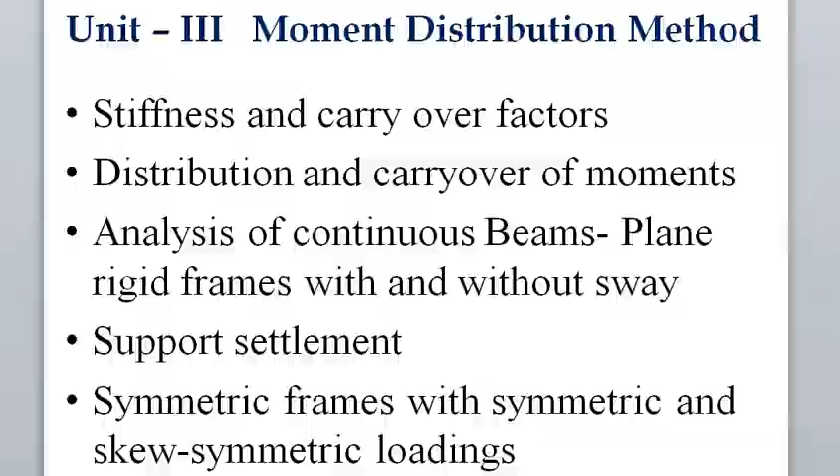In the previous lecture, we have discussed about the procedure in solving the rigid frame with the sway effect. So based on that procedure, we will try to solve this problem.

Analyze the rigid frame shown in figure by moment distribution method. In this frame we have one horizontal load at joint B and supports A and D are fixed but at different levels. That is geometrically unsymmetrical and horizontal load is active. Therefore, the frame will sway.

So the analysis of this problem consists of two parts. First part is non-sway analysis and the second part is sway analysis.

In non-sway analysis, we arrest the movement of the frame by providing a virtual horizontal support at joint C.

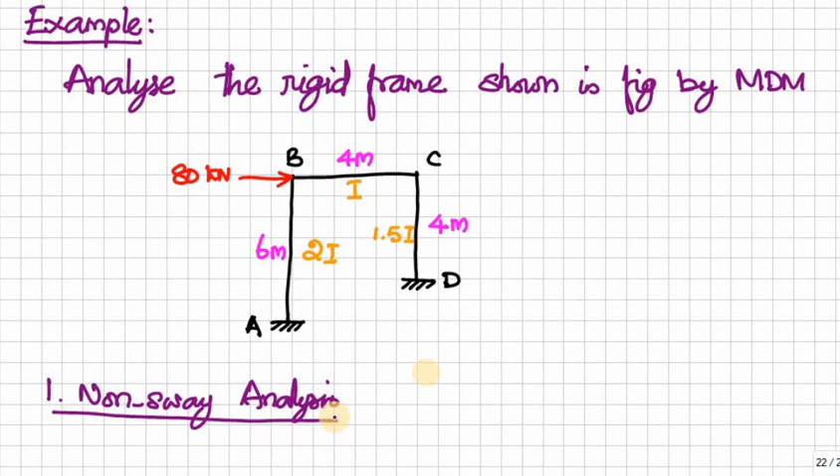And there is no span load in this problem, so fixed end moment in all members is equal to 0. So we assume the horizontal reaction in the virtual support as S.

As fixed end moments in all members are 0, there is no non-sway moments at joints. So no need to formulate or derive the distribution factors in this non-sway analysis and no need for distribution table.

Suppose if we have any span loads causing fixed end moments, then we should derive the distribution factor as well as distribution table so that we will get joint moments. For example, say MAB, MBA, MBC, MCB, MCD and MDC.

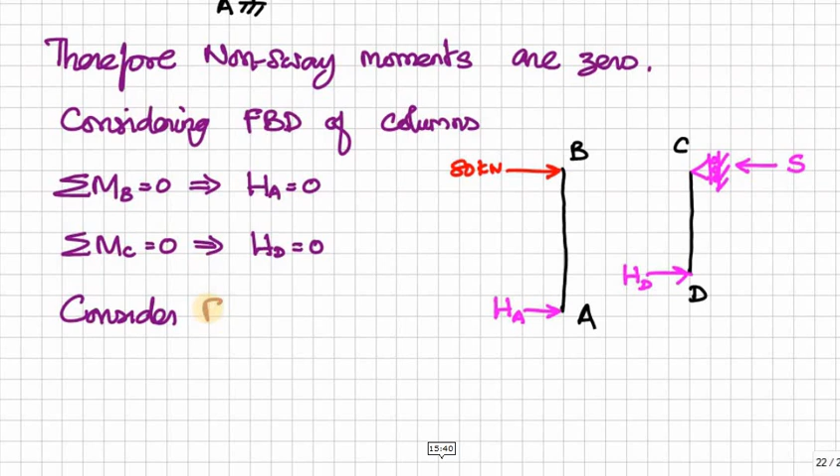Now consider the free body diagram of horizontal beam, that is BC. Here also applying sigma H is equal to 0, we are getting the value for S, which is equal to 80 kilonewton acting towards left direction.

So that's all the non-sway analysis step. Now we have to carry out sway analysis step.

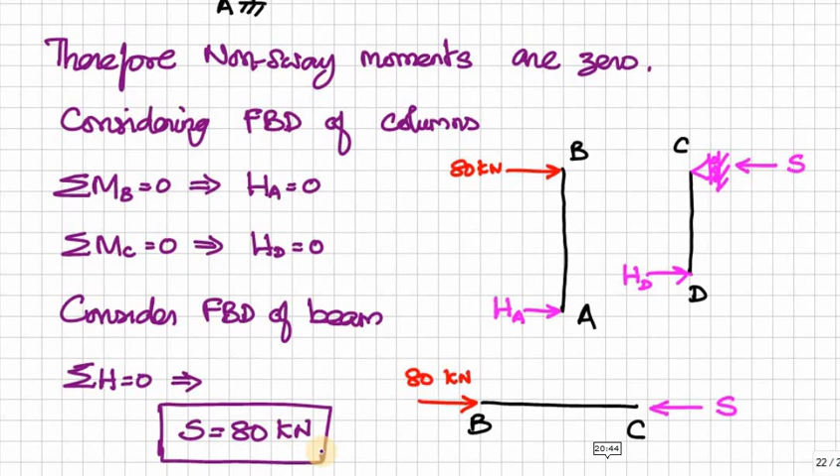And we don't know exactly the sway, that is delta, by which the frame will move towards right or left. We initially assume the sway as delta amount. So we will carry out the sway analysis by this assumption delta.

Later on we will find out the actual sway moment.

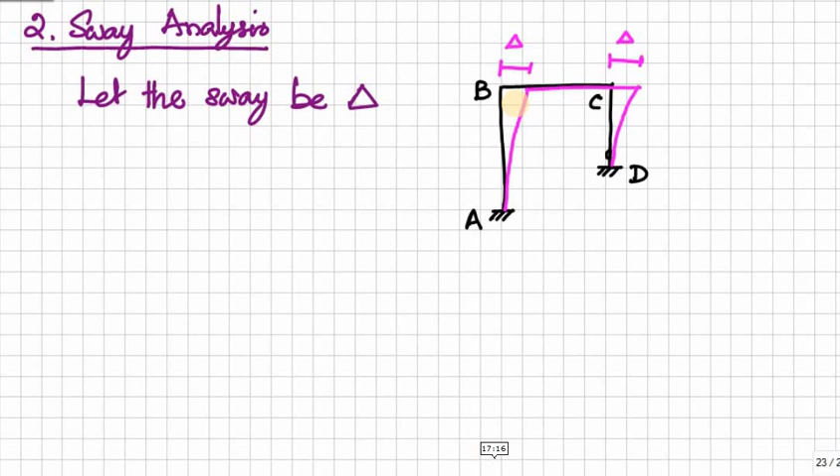So because of the sway by delta amount, the column AB will have some moments due to this delta. Similarly, CD column will have some moments due to this delta. But there is no moment in BC due to this sway delta, because as far as BC is concerned, only rigid body motion happens. There is no relative displacement between B and C joints.

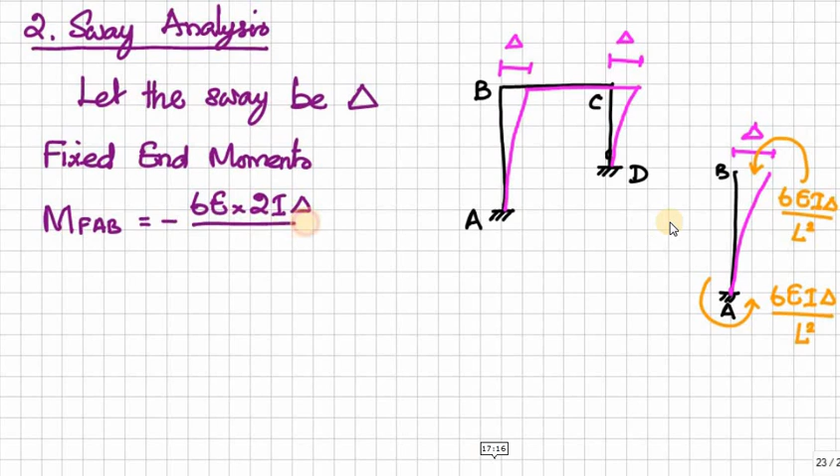So due to this delta, the fixed end moments MFAB is equal to MFBA, is equal to 6 times EI delta by L square, and in the anti-clockwise direction, therefore minus. So minus 6 EI. For AB column we have 2I, therefore 6 EI into 2I delta by L square, L is nothing but 6, therefore 6 square. So which is equal to minus EI delta by 3.

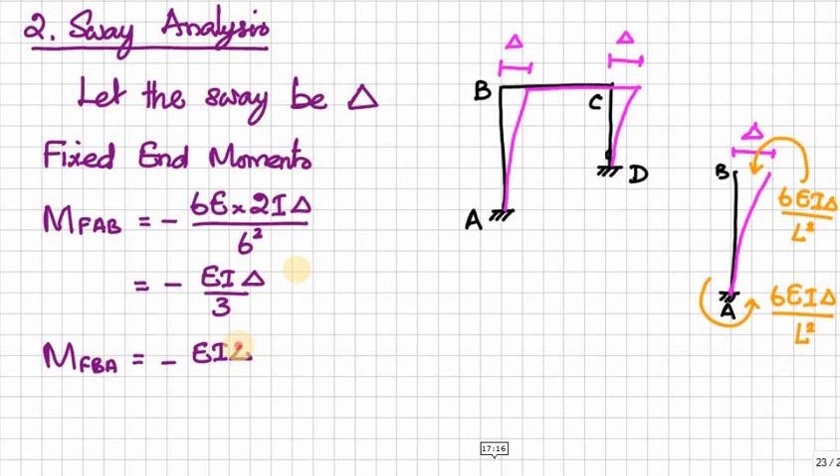So MFBA is also equal to minus EI delta by 3, with the same sense of moment and same numerical value. And considering CD,

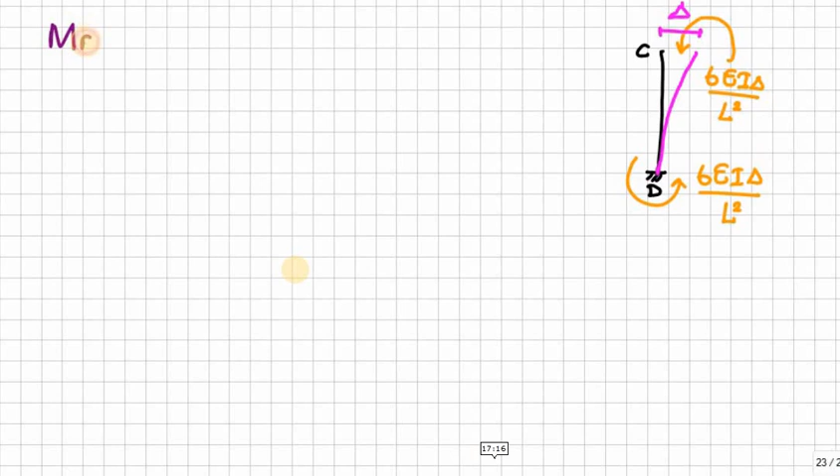MFCD is equal to MFDC is equal to minus 6EI into 1.5 times I delta by 4 square, because L is equal to 4 meter and I is equal to 1.5I. So which is equal to minus 9 by 16 EI delta.

So these are the fixed end moments based on the assumed sway delta. We don't know the actual delta value. So to start the problem, the sway analysis, we need some numerical value. Unless we have a numerical value, we can't do the distribution table step.

Therefore, initially we assume proportionally the moment, sway moment or joint moment, because so far we have the fixed end moment. So we initially assume proportionally between the columns by taking ratio between those two columns' moments.

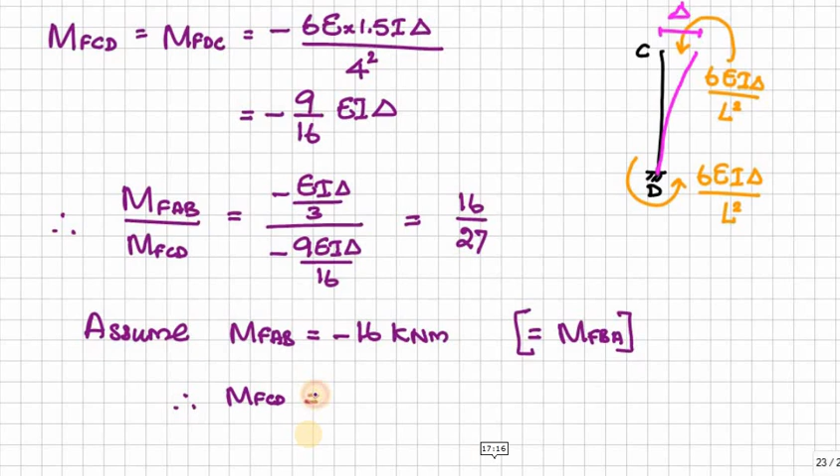Because now the moments are anti-clockwise. In AB column and CD column we have anti-clockwise moment. Therefore minus 16 kilonewton meter, which is also equal to fixed end moment in BA. Similarly, fixed end moment CD is equal to minus 27 kilonewton meter, which is also equal to MFDC. Now we have the fixed end moment.

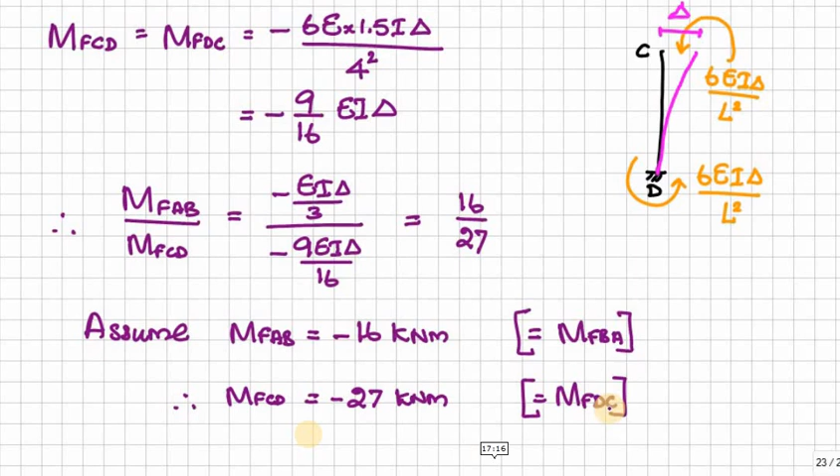Then the next step in sway analysis is to find out distribution factors. So at joint B, stiffness of BA member is equal to 4EI by L because the further end is fixed support. So 4E into 2 times I divided by 6, which is equal to 4 by 3 EI. Similarly, stiffness for BC member is equal to the general formula 4EI by L, which is equal to 4E into I, the stiffness I for BC is just I itself, therefore it is equal to EI.

So distribution factor for BA is equal to KBA divided by sigma K, which is equal to 4 by 3 EI over 4 by 3 EI plus EI, is equal to 4 by 7.

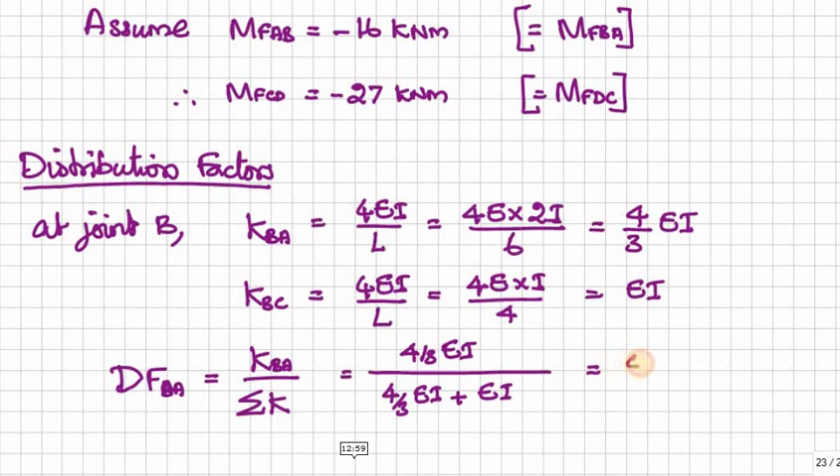Therefore, distribution factor for BC is equal to KBC divided by sigma K, or since we have only 2 members at this joint, therefore 1 minus distribution factor for BA. Either way we can calculate distribution factor for BC, either using the formula or using the principle that summation of all distribution factors at any joint is equal to 1. So from that principle we can directly get the value of distribution factor for BC as 1 minus distribution factor for BA, which is equal to 3 by 7.

So no need to waste our time. Just if you get 4 by 7, then if we have only 2 members at that joint, then straight away we can write distribution factor for BC is equal to 3 by 7.

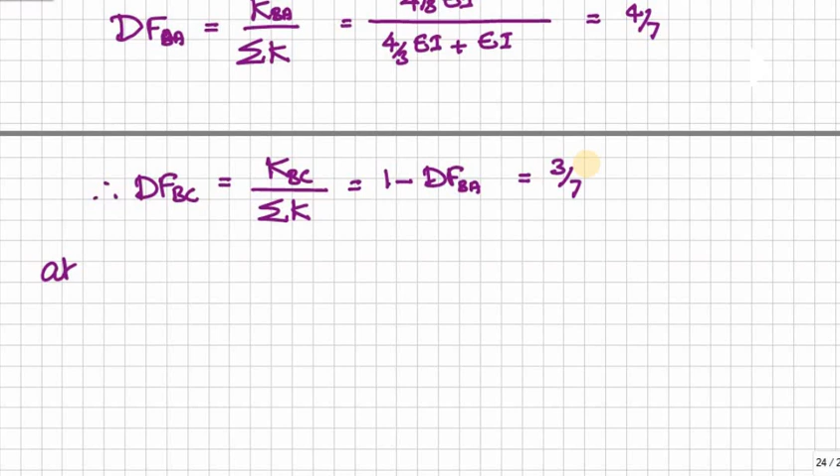Now considering joint C, KCB is equal to 4EI by L, the general formula. So substituting I value and L value, we have EI. Similarly, KCD is equal to 4E into 1.5I divided by 4. Therefore, which is equal to 1.5 times EI.

Now, distribution factor for CB, the DFCB, is equal to KCB divided by sigma K, which is equal to 2 by 5. Similarly, DFCD is equal to just 3 by 5, because 2 by 5, so 3 by 5, since we have only 2 members at this joint.

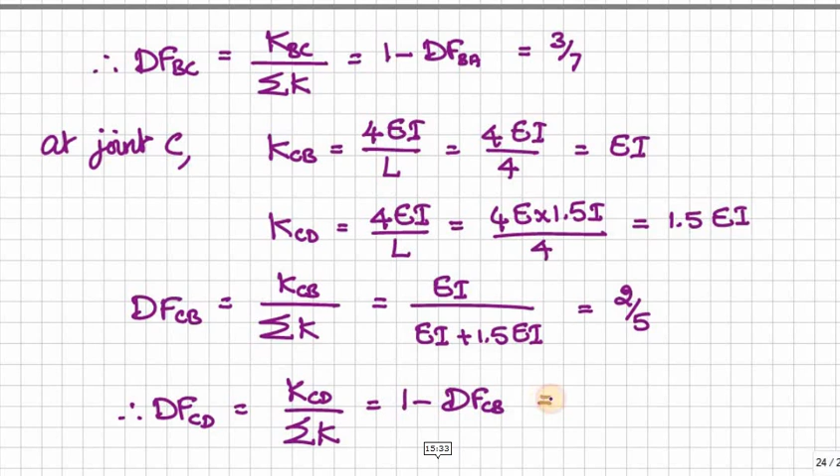Now we can start the distribution table. So we have all those things: joint A, B, C, D, members AB, BA, BC, CB, CD, DC. Then distribution factor at joint B and joint C.

Then fixed end moment. Just we assume: minus 16 for AB, minus 16 for BA, here 0, 0, but because of rigid body motion, movement. Then for CD minus 27, DC minus 27.

Okay, so now we will start the process: balance and carryover. Repeating this balance and carryover till we get the balance as a fractional value, then we can stop. And we can sum up all the moments in a column, vertical column, to get the final moment.

We'll start the balance, because at joint B we have only minus 16. Therefore we have to balance it. Sigma MB equal to 0 should be satisfied at joint B. Right now we have minus 16, and here that's 0. Therefore net moment or balance moment at joint B is minus 16. So to make it 0, we have to apply plus 16.

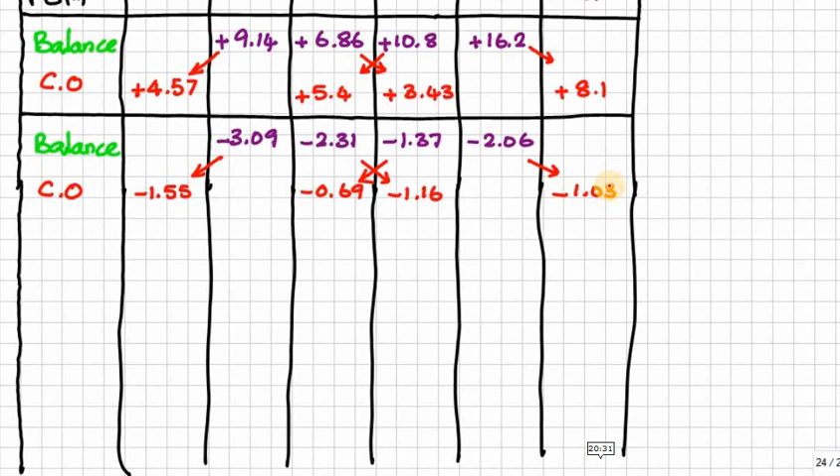Half of the moment will be carried over forward. If the subjoint is BA, then AB will get the carryover moment; similarly for BC meaning CB, CB meaning BC, and so on. So again the equilibrium is not maintained because of this carryover moment. We have to balance minus 0.69 at joint B, minus 1.16 at joint C, by applying the opposite moment, plus 0.69, distributed according to distribution factor.

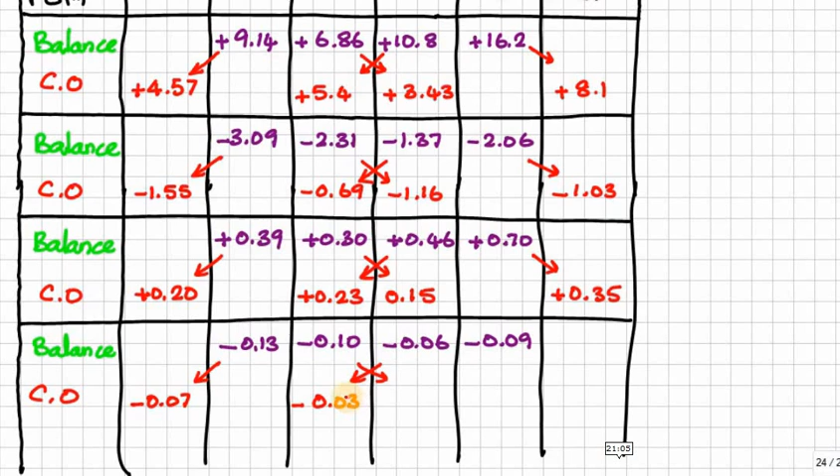The same steps are repeated until we get insignificant values in the balance system. See the balanced moment is just 0.01, 0.02, something very insignificant. Therefore we can stop this process and calculate the final moments.

We have to sum up all the moments in the vertical column against each member algebraically. It comes around minus 12.85 under AB, minus 9.67 under BA, plus 9.67 under BC, plus 12.22 under CB, minus 12.22 under CD, and minus 19.63 under DC. These are the sway moments, based on the assumed fixed end moments. Remember, this is a kind of assumed sway moment, not the actual sway moment.

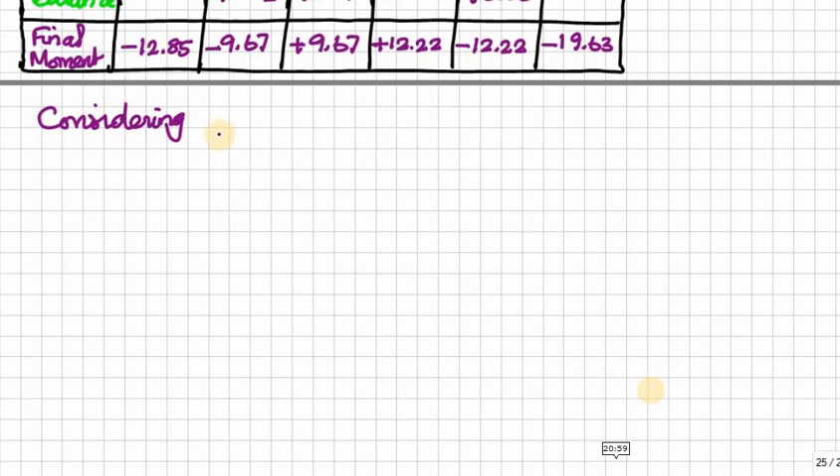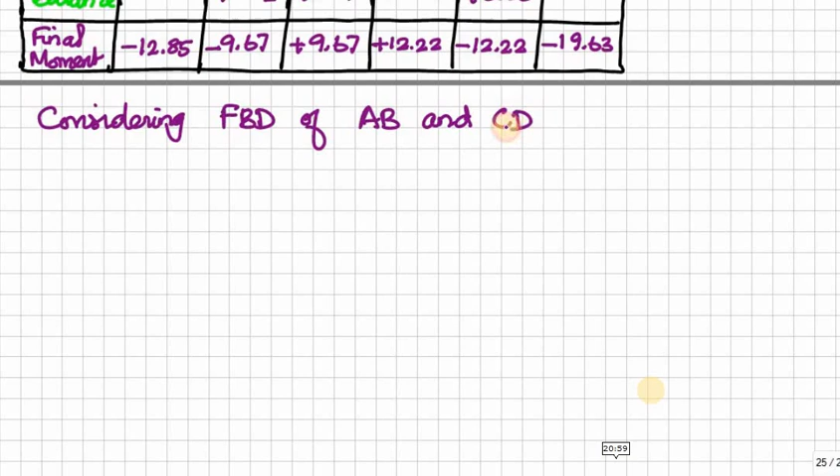Now we will try to find out the S dash value, because this is the assumed one, that's why S dash. For this S dash value, we get these assumed sway moments. So further we have to consider the free body diagram of columns AB and CD to calculate the horizontal reaction at A and at D.

This is the free body diagram. For AB, we have HA dash, because I put dash for these assumed sway moments. Due to assumed sway moments, we have HA dash, which is 12.85 from this distribution table, minus 12.85, therefore anti-clockwise direction. Here also minus 9.67, anti-clockwise. Here also minus 12.22 anti-clockwise, minus 19.63 anti-clockwise. Of course here we have some S dash value because of the reaction at the virtual support.

Now taking moments about B in column AB gives HA dash into 6 meters plus this moment 12.85 plus this 9.67 equals 0. Therefore HA dash equals minus 3.75 kilonewton. That means HA dash is acting towards the left side, not the assumed direction of right side.

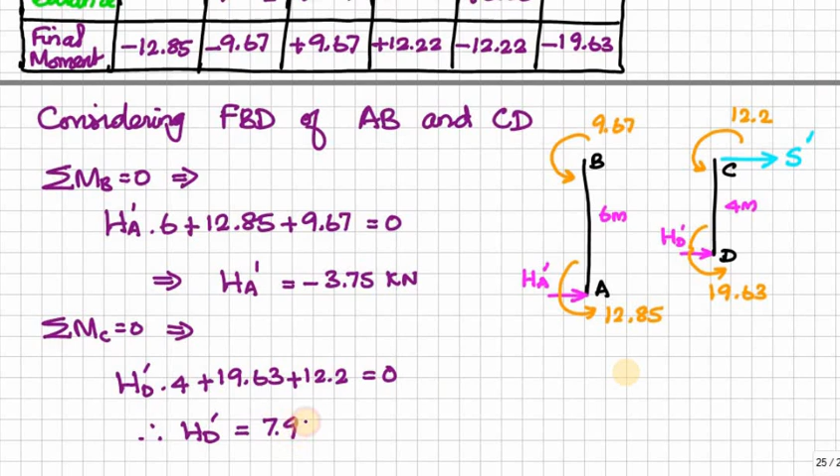Similarly, taking moments about C, HD dash into 4 plus 19.63 plus 12.2 equals 0, which gives HD dash equals minus 7.96 kilonewton. That means HD dash is actually acting towards the left direction, not the right direction. Here we have minus, minus is missing, actually minus.

So taking overall, sigma H is equal to 0, therefore HA dash is assumed direction only, but we will now substitute the values in minus. So HA dash plus HD dash plus S dash is equal to 0. Therefore S dash is equal to minus HA dash plus minus HD dash. But this minus, that minus will get cancelled, therefore we get positive answer. Positive answer in the sense S dash is actually acting towards the right side. So this direction is correct.

Only these directions are not correct, just the opposite. HA dash is acting towards left direction. HD dash is also acting towards left direction. Only S dash is acting towards the right direction.

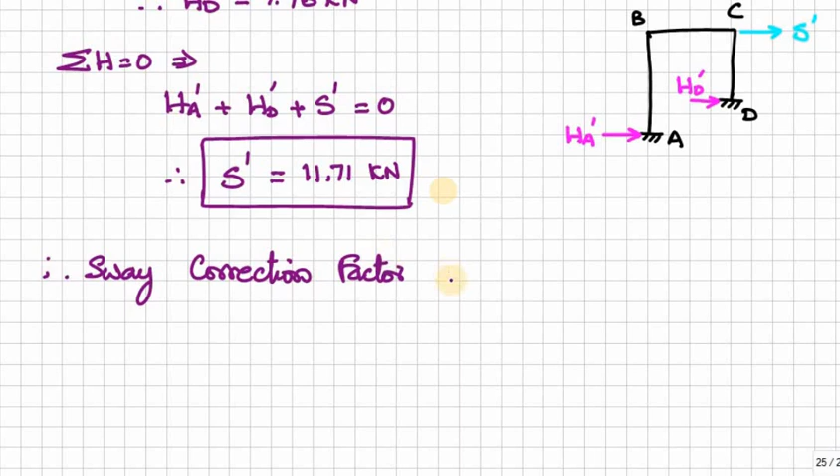Therefore, sway correction factor K is equal to S over S dash, which is equal to 80 divided by 11.71, which is equal to 6.83. That means the actual sway moment is 6.83 times more than what we have got as assumed sway moments. Clear? So whatever values we get based on the assumed sway, we have to multiply by 6.83 to get the actual sway values.

Therefore, actual horizontal reaction at A is equal to minus 3.75 into 6.83, or 6.83 by minus 3.75. This minus 3.75 is based on the assumed sway. So this is the sway correction factor. Therefore, we get minus 25.61 kilonewton. So this is the horizontal reaction due to sway.

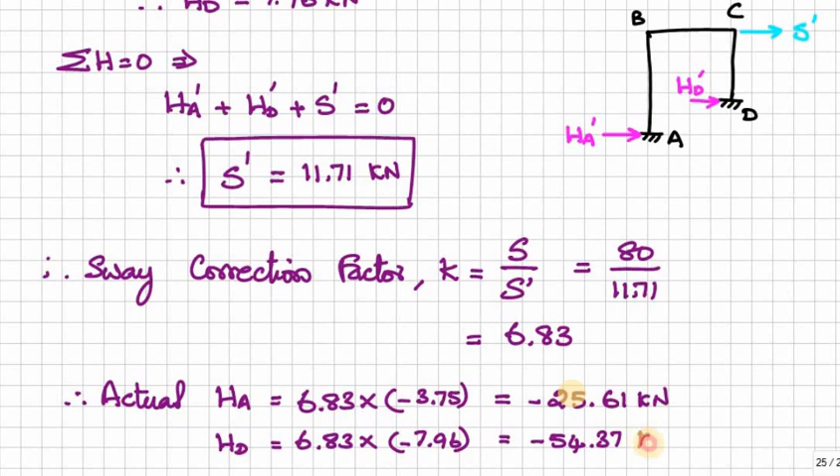Similarly, for HD is equal to 6.83 times minus 7.96 kilonewton, which is equal to minus 54.87 kilonewton.

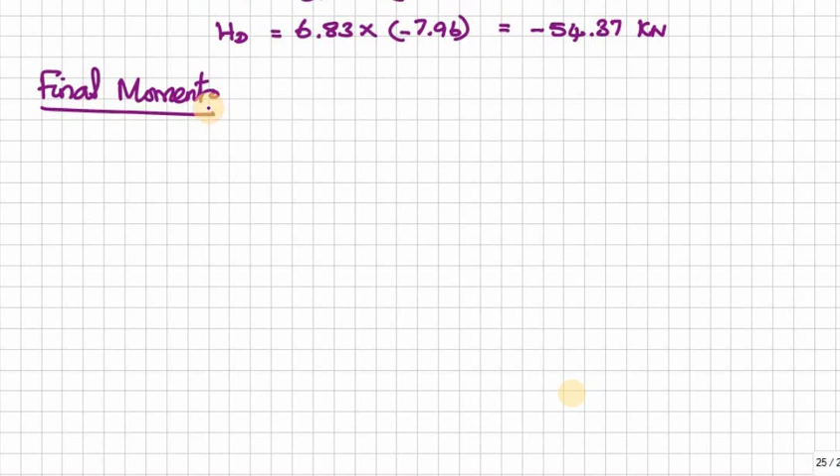So now we can calculate the final moment, which is equal to non-sway moment plus actual sway. So the non-sway moment is 0 in this case because there are no fixed moments, therefore no distribution happens, therefore all 0 values. Suppose if we have any joint moments, fixed end moments due to the span load, then we would have got the distribution table. From that distribution table we have to substitute the values here as non-sway moments.

So now the assumed sway moment, what we have got from the distribution table in the second step, that is the sway analysis step. So this actual sway moment is just 6.83 times the assumed sway moment. So minus 12.85 into 6.83 will give the actual sway moment, which is equal to minus 87.77. Similarly, all other values.

Now final moment will be the summation of non-sway moment and the actual sway moment, this and this. Okay, now I think it will be clear. We have to add only this, no, this pink or the orange color. So since non-sway moments are 0, so we get final moment, that is actual sway moment as our final moment.

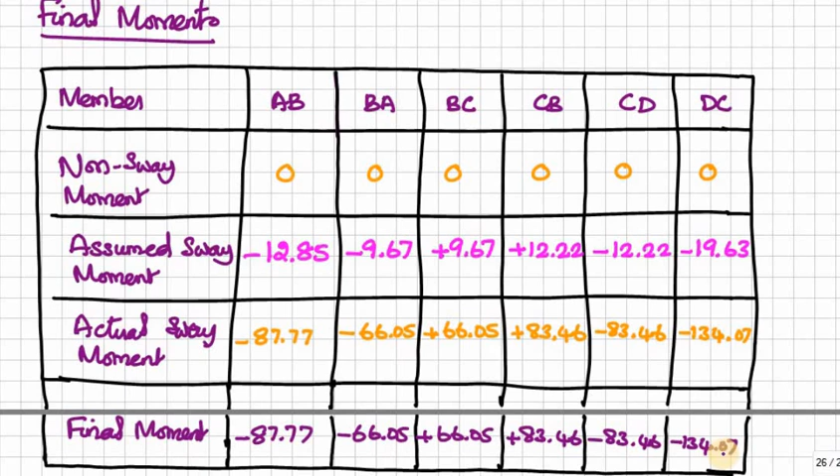So once we have the joint moments, we can draw the bending moment diagram. So first we have to draw the profile A, B, C, D. Over that profile we have to apply, specify the points. Then we have to draw the bending moment as usual.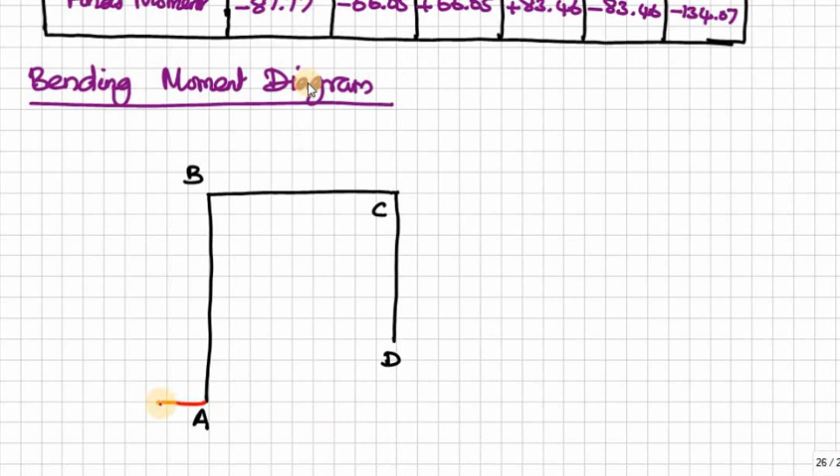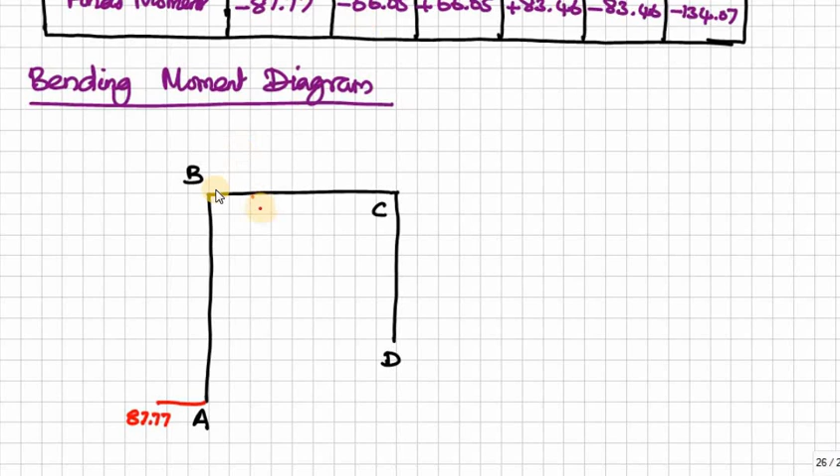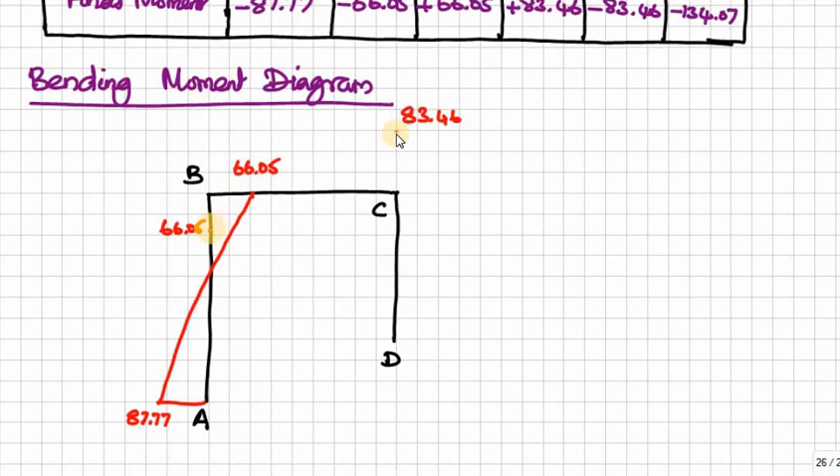So at joint A, we have to mark minus 87.77. Therefore, we are inside the frame, therefore above the AB line, and again it is negative, therefore below the AB line. So here, now join these two lines to get the bending moment diagram or support moments, or joint moments over AB. Similarly for BC, we have positive moment at B, therefore we have to specify below the BC line, and at the other end we have positive 83.46, therefore above the BC line we have to specify that point. Now join this.

So that is our moment diagram over BC. Similarly, this is 83.46 minus, therefore above CD we have to specify. Here again minus, therefore below CD line. Minus 134.07, here we have to specify. Now join these two line points to get the overall moment diagram. So this is the bending moment diagram.